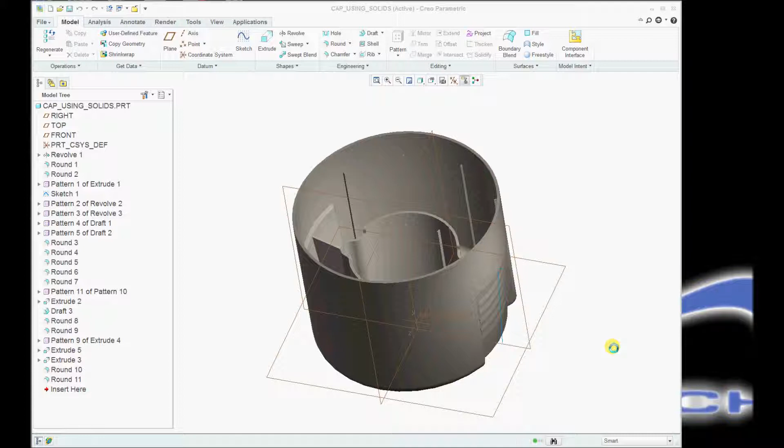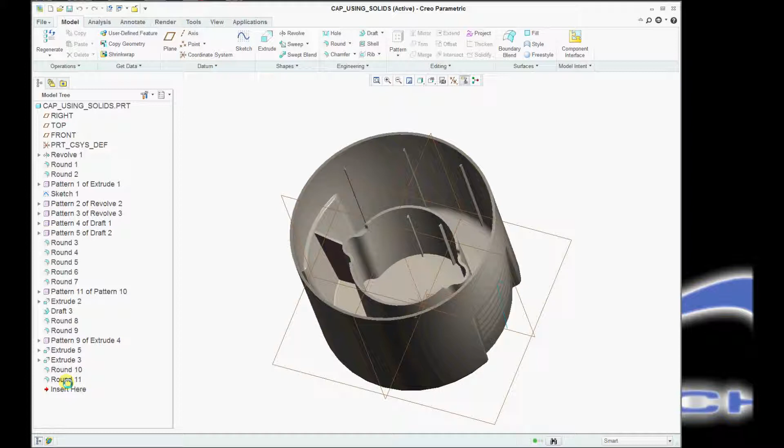What I thought I would do is kind of back through a model that I've already created to keep everyone from having to sit through the boring setup of things. I thought it would be a better way to do it. So I'm going to move my insert mode up, and I'm going to run through the steps of this model in solids.

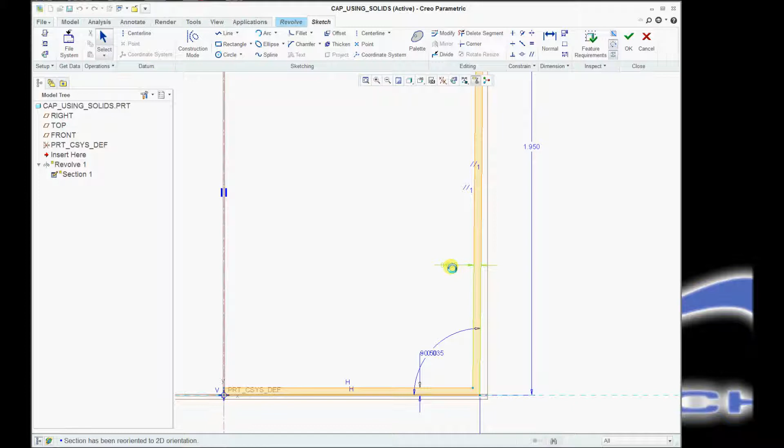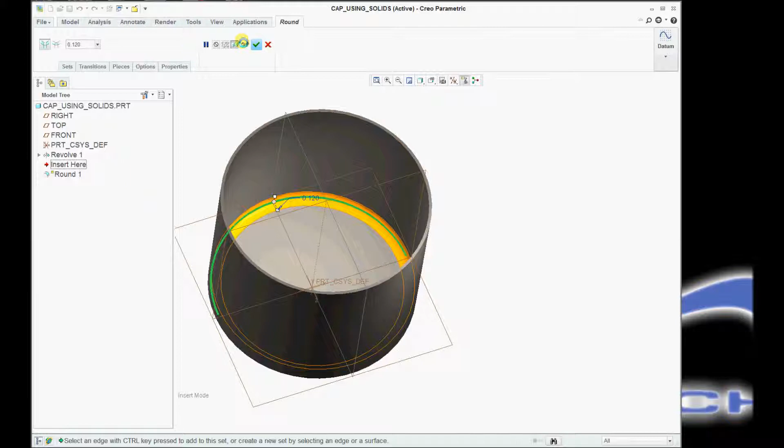So as you can see, I'll edit definition, and this is simply a revolve by sketching the profile with the material thickness at 0.035 and a draft angle. So it's pretty simple to get the first solid. Then what I do is I add the round to the inside, and I'll highlight it at 120, and then the outer round at 150.

And then what I do, I came in and I did these little ribs that are on the inside for structure, just to kind of keep the walls a little bit more rigid. It's a really thin wall part, and it's made out of probably a polyethylene or an HDPE or something. It's really super flexible, but with those little guys in there, it seems to get a little stronger.

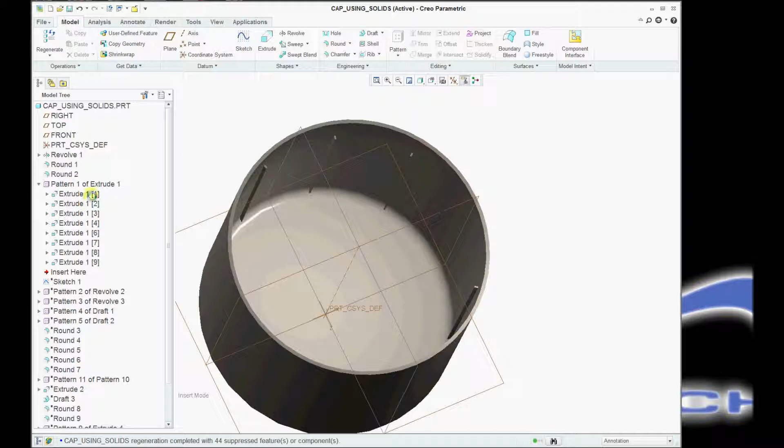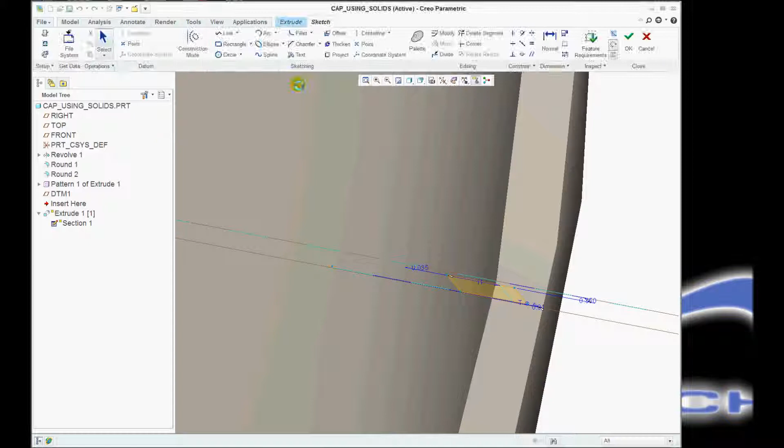So essentially what that is, it's a pattern of ribs, and you'll notice that I've created an offset plane through the axis, and then just driven a little rib basically both sides of that. I can go to the sketch view if you like, and you can kind of see what I've sketched. What I've done is I've basically used the edges of the part to offset to give me my intersections to make sure the things overlap. So that should be pretty straightforward. And then of course just patterned the ribs around.

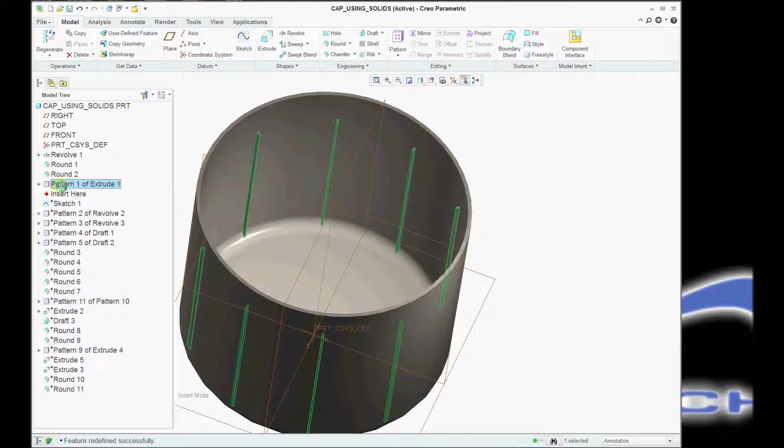And what I also did is I actually took out, by selecting these dots, the ones basically at 3 and 9 o'clock, because we have a little indent here that we're going to have to put on both sides. So all I did is I patterned and then just removed those two from the pattern.

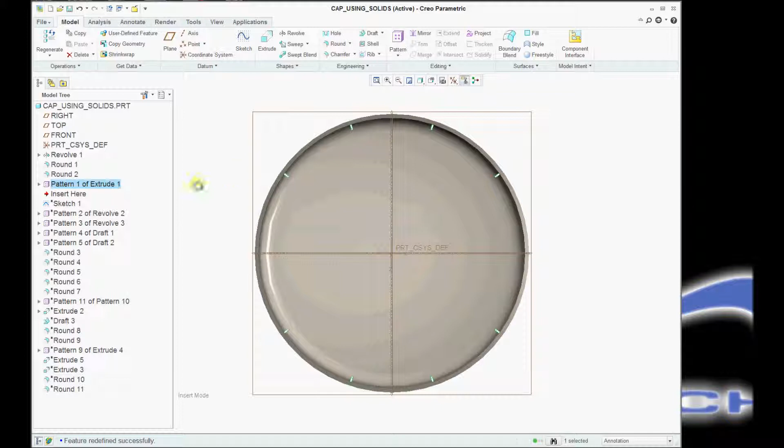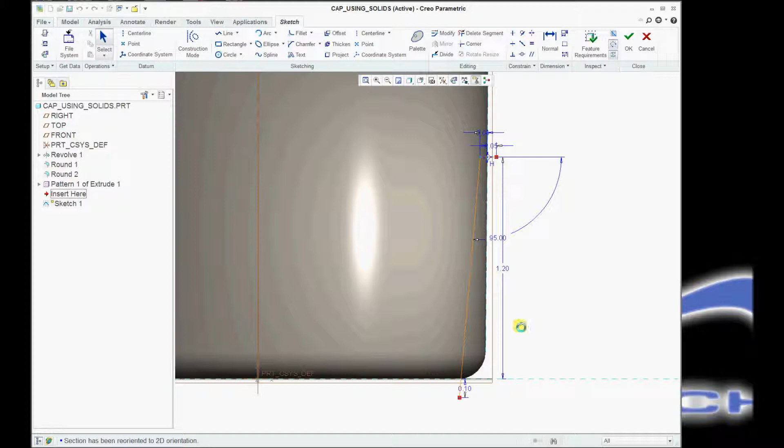Then what I did is I put in a little sketch, and this is going to act as our little indents. It's a placeholder, and it allows me to go in and add this, and it's just kind of there for use later on. So again, I'm going to take off my shading to show you what this is. It's simply a datum curve on this plane, a datum sketch.

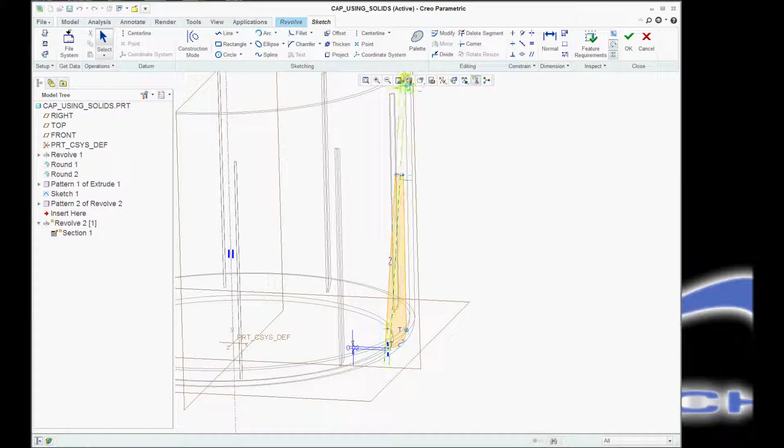So here's where we start using that sketch as a driver for this thickness that's going to be on the part. So all I did is I offset that datum curve, or sorry, sketched at 0.35, and then I offset this silhouette edge in about 0.015, and what that did is allowed me to make sure that my sketch always intersects the base wall.

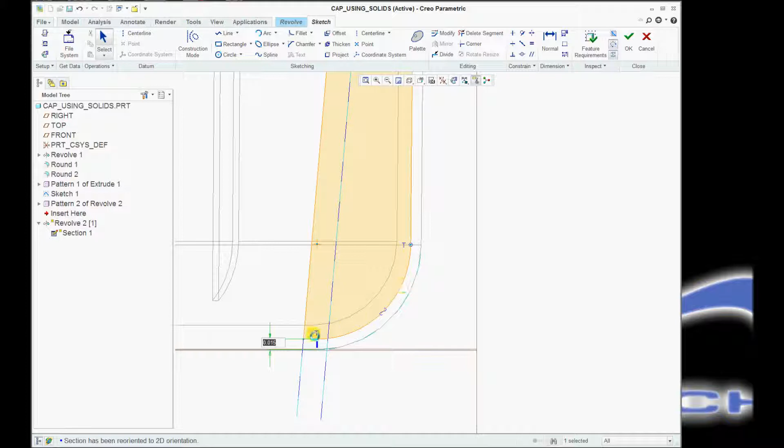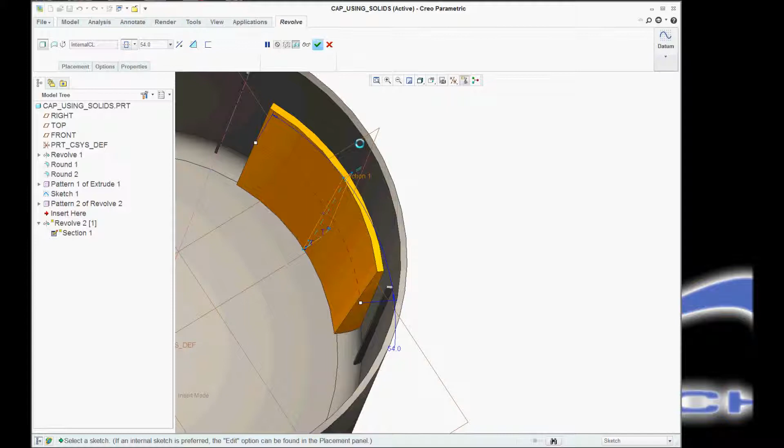And what it was is a revolve. Let me turn the shading on here. Let me go back to this edit definition, and all I've done is I've basically driven it 54 degrees both sides of this datum plane. And then what I did is I actually just did a pattern of it, and I put it to the other side.

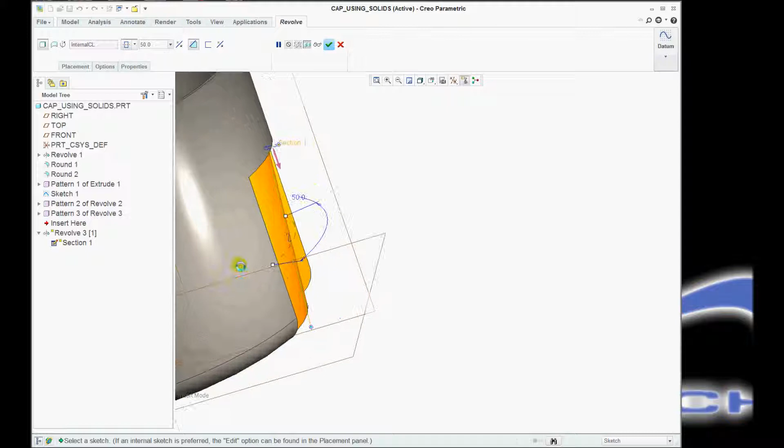Now this revolve is the cut. It's a removal of material. It's at a 50-degree angle, and all I've done is I've used that edge, or that sketch, as the basis of the cut, and removed the material on that 50-degree angle, and then I patterned it to the other side.

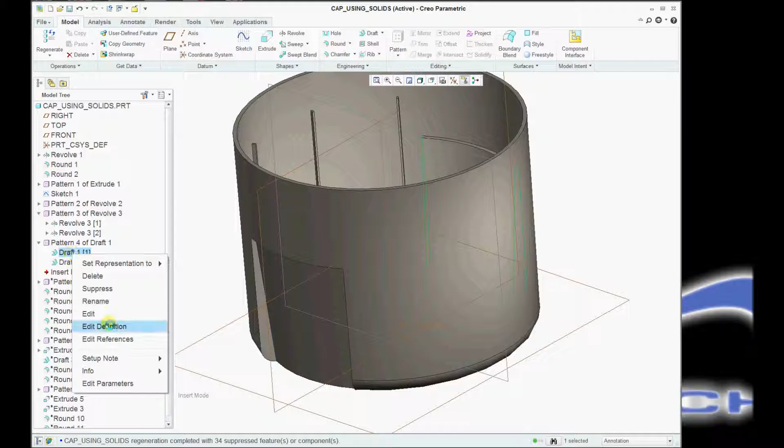Then I've put in a draft, which is on the two side walls of the inner indent, and I've simply done a reference pattern, and it's gone over to the other side as well, right here. And I did the exact same thing on the outer surfaces.